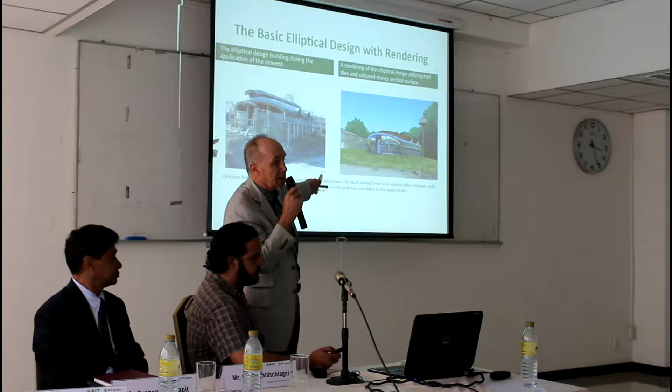This shows the building that I constructed in the mountains, under construction. That's a rendering of what it could look like, and a client of mine in Florida, in the US, asked if I could make a rendering that showed the same structure, but with a different look. And there it is, which is cultured stone and a tile roof over the ferrocement.

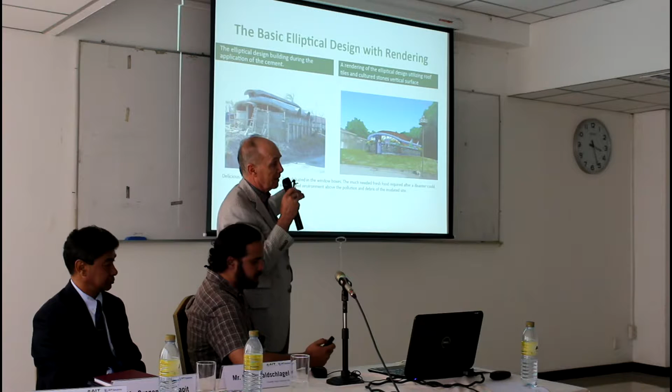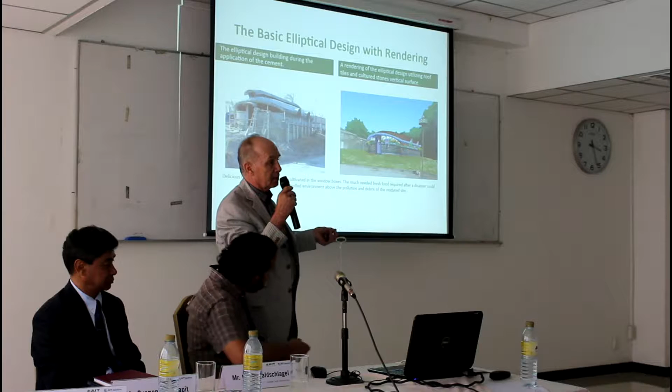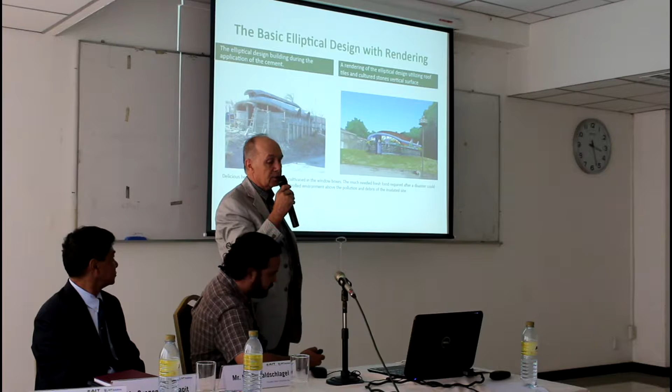It's an interesting thought I came up with when I was doing this one for them, that the gutter form could be used as a planter around the windows to make it look more cottage-like. But then I realized that people in a disaster, say a flood zone, the land would be useless and they couldn't grow crops, perhaps for a very long time, and they would need food right away rather than wait for food trucks. You could put good earth in the planters around your whole house and always grow lettuces and things like that, so you'd have a food source. And I'm sure when you have no food, it'd be very convenient.

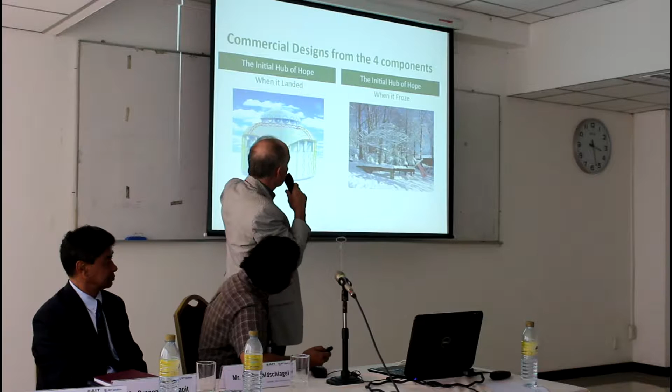This one on the right is in my yard on Staten Island, New York, and I thought it was just a nice photo covered with snow. This is a rendering of the beginning of what it could look like. I see this, and originally I designed it as being 150 feet in diameter, some kind of, I called it the initial hub of hope, a hospital or trauma center.

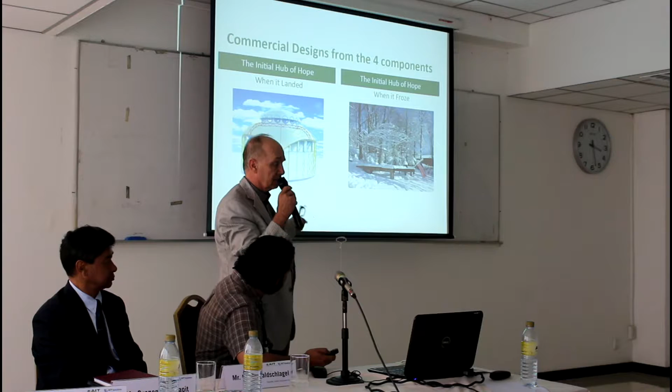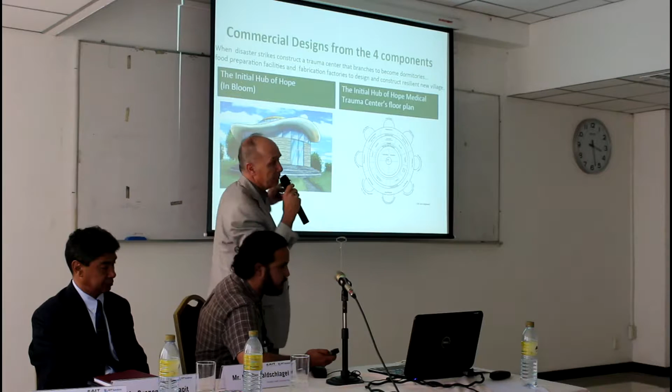I'm going to try to describe the simplicity of constructing these buildings. They're very tent-like. So that's the floor plan, and that's another rendering of what it could look like with a finish on it.

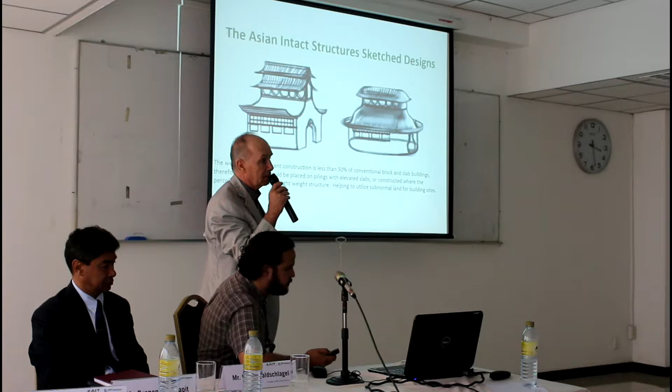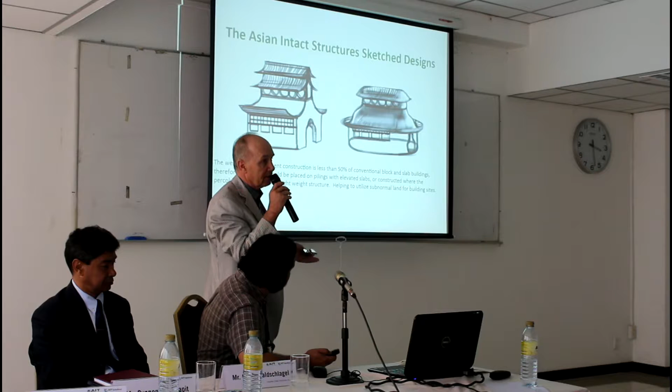These are sketches that I try to make an Asian intact structure, to make the buildings look different. I'll probably be able to show you how the components, of which there are about 5, all make these designs and shapes that you're seeing.

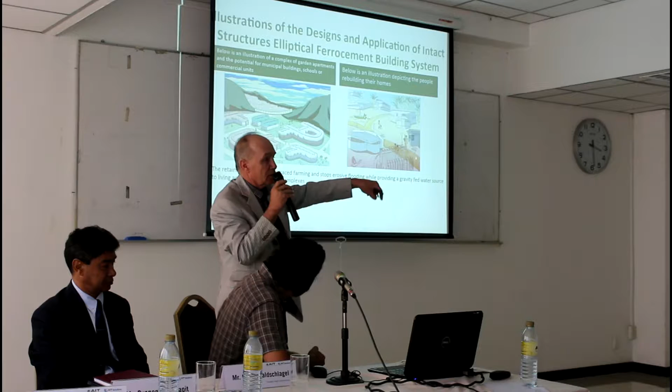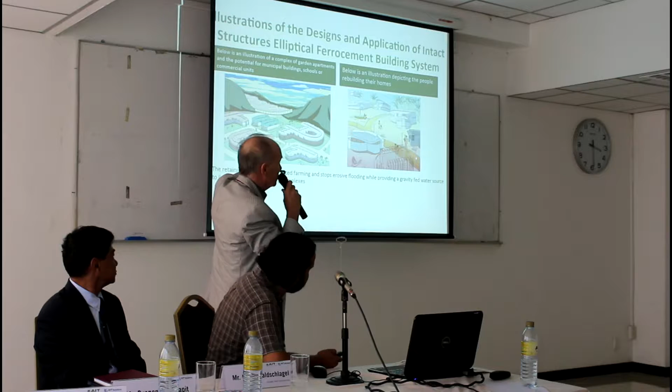These renderings are basically the shape of the building that was built in the mountains in Mexico. The components, which you can see in the frame, more or less just go around the perimeter of any footprint or foundation that you made. Those buildings could be, I speak in feet, so they could be 100 feet long, like garden apartments, factories, or schools. And they could have inner courtyards for safety in very dangerous areas of the world where there's so many refugees now, where they just fence them in and they're all unprotected.

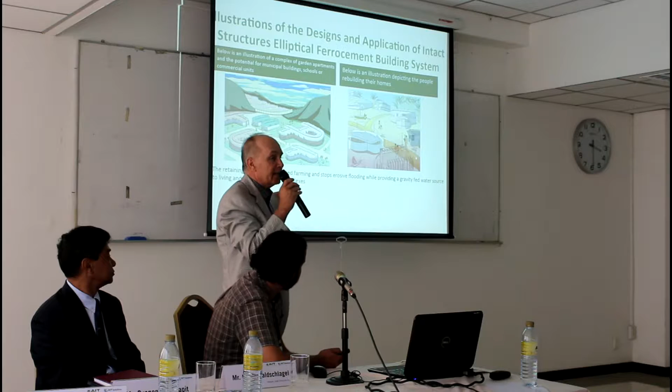Perhaps these are solutions to hundreds of thousands of people with nothing for a year. But they do erect like tents.

This was published in Ferro 9 in Singapore, the University of Singapore. This is a ferrocement retaining wall, and I did build a prototype on Staten Island in New York, a small one. But then I realized that because I built it without a footing, I don't want to actually call it a dead man, that block of cement in the back, holding it, and that's a geotextile on top of a ferrocement.

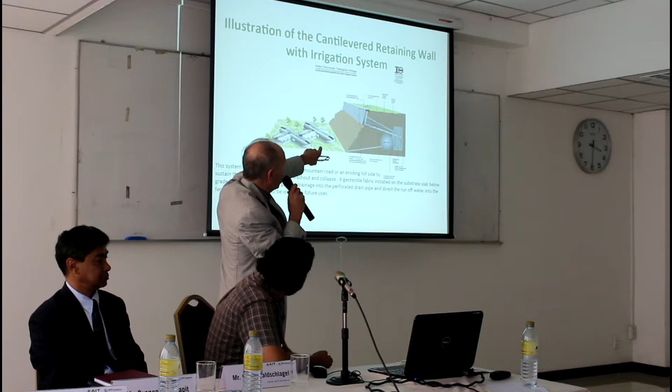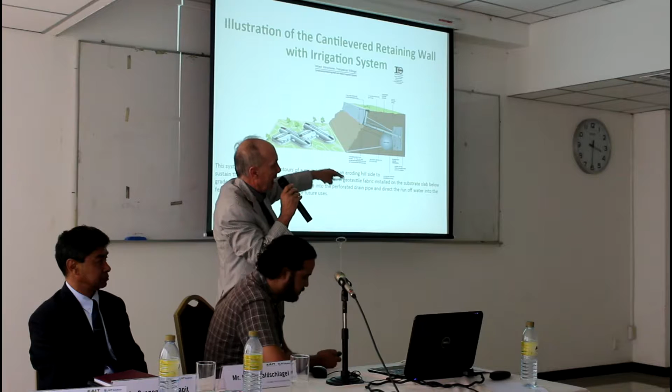Well, there's concrete beams coming out, and then there's a ferro cement slab, and that's a ferro cement wall. But there's a geotextile, so you get two irrigation potentials. When it rains, if you had a terrace farm on the top, it would come down, hit the geotextile, so you had one farm. It would then go to the tank, because the geotextile would capillary it back to the tank, and then you could irrigate or supply water to the valley below that had been, in the past, a flood zone or a mudslide zone.

There's another product that you're going to see from a company from Argentina that is also a ferro cement product that would also assist that, culverts or gabions. Let's bring it along, please.

The interesting thing with ferro cement, and this is just recent, I probably knew it, but it was probably subliminal, is that it's morphogenetic. In other words, you could show up at a site with exactly the same material, not many different types of material—rebar, 6x6 wire and wire mesh, Portland cement, and an aggregate—and you could produce tanks, culverts, pipes, houses, retaining walls, with the same thing, the same truck, everything's the same. That's morphogenetic, it's the same form. It's a pretty interesting approach.

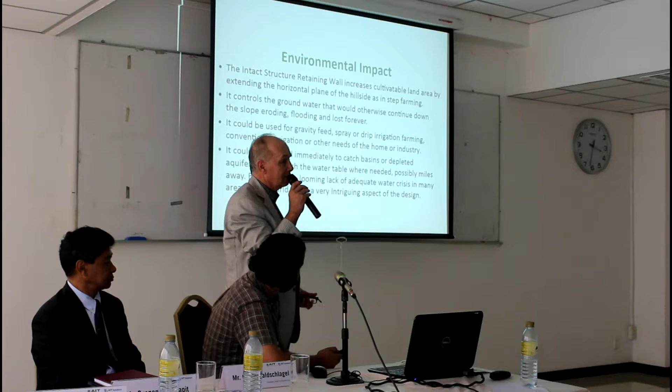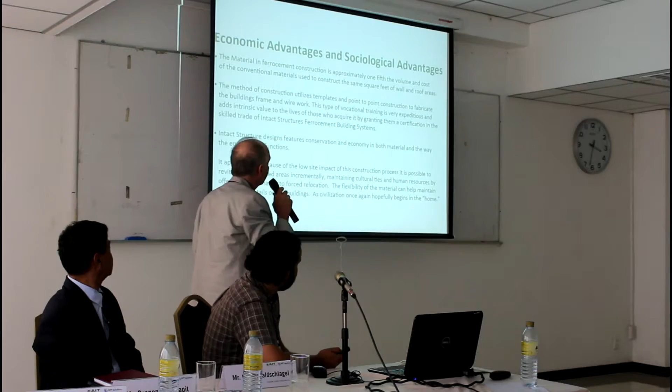I'm actually a designer constructor more than a ferro cement company. Obviously, I built a house in Mexico and that wall, but this company—he's been in the ferro cement business for 30 years, and he came to my yard and decided that I was onto something, and he's working with me. We intend to do two versions of that building system: one is precast components, and one is the way I built it in Mexico, because he's a precast expert.

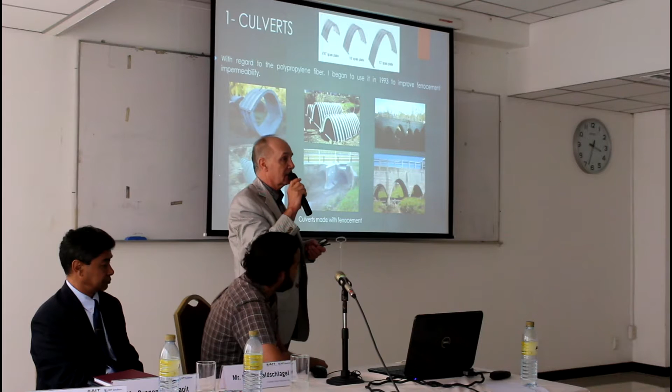And there is a man, J.A. Desai, who's a maestro of ferro cement in India, in Mumbai. I did go there twice, and I did study his work. Certainly I don't know what he knows. Carlos Giswin knows a lot about it, and he has these products, as I said, for 30 years in Argentina.

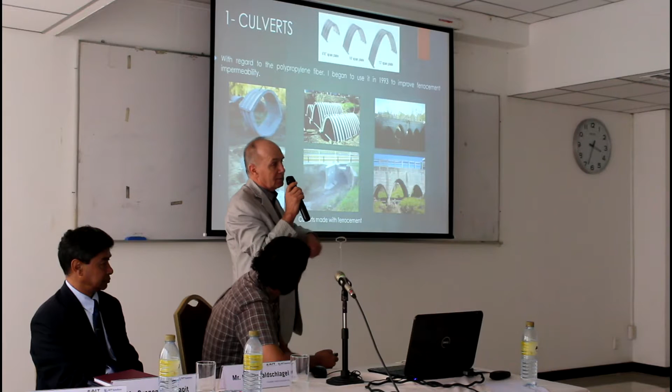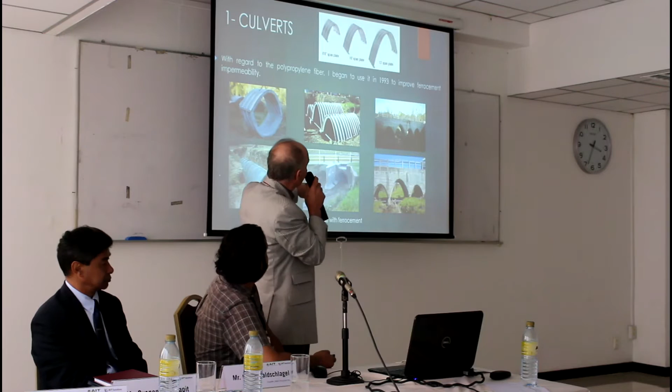This would dovetail into reclaiming land that we could get for nothing, perhaps. In rural areas, there may be land nobody cares about, because it never worked—it was always washed out, and you could stop that from happening, which is the way most of the modern world was built. Okay. Anyhow, so he has culverts, and he has—go ahead, please.

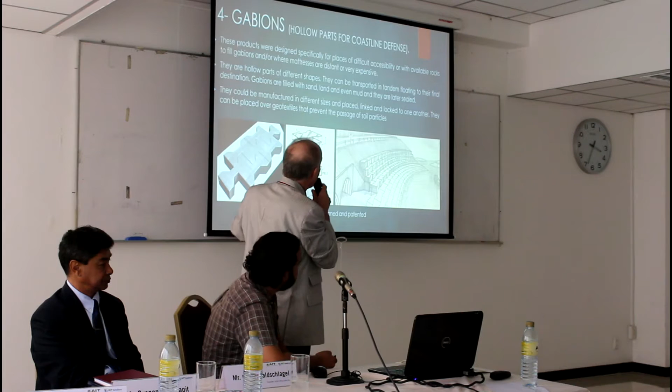Go ahead, please—pipes. Please—gabions, which I found very interesting. Please click, there they are. For stopping erosion and creating circumstances that I'm speaking about. And Carlos is ready, and he's asking for work, in a way.

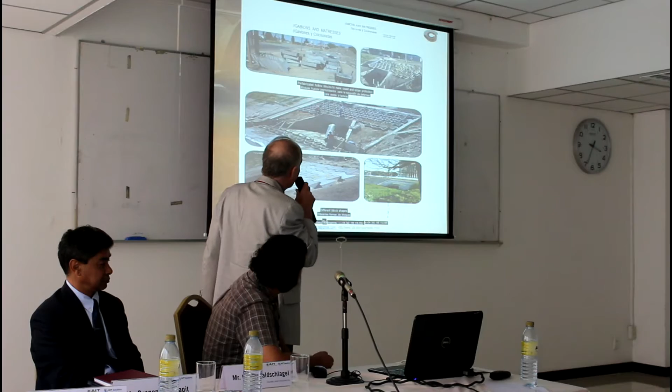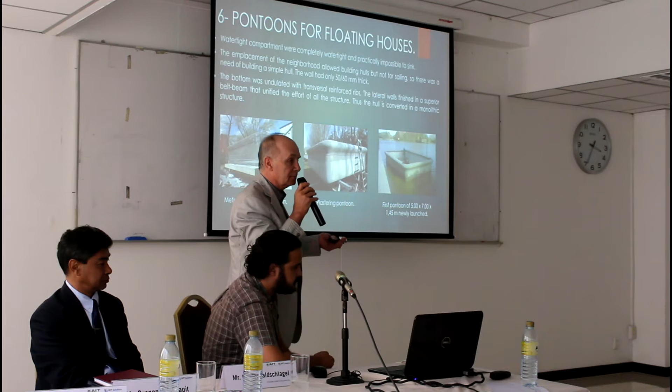Argentina's got an economy that's having trouble. He makes pontoons also, and I saw somewhere in one of these presentations about floating houses in Thailand. And somebody was very interested in that in the Philippines.

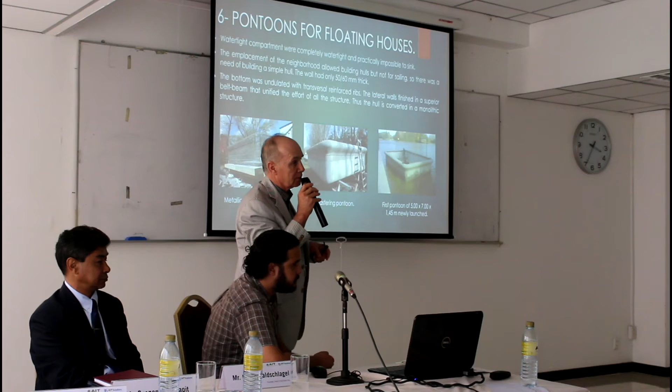By the way, what you saw in the beginning could be very good evacuation centers, and they are very sought after—things that would be structural after a disaster hit, where you could bring people and they would be self-sustaining. Okay, please click, there's this floating houses.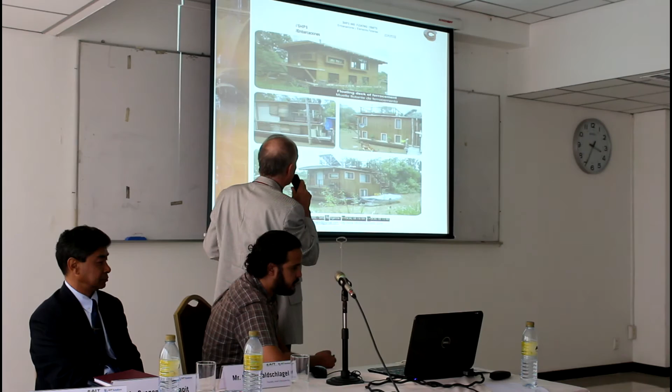One more, please. One more. More. I think it's over. I think that's it. Okay, hopefully it was sufficient enough to communicate.

Oh yeah, this will show. This will be quick, it's almost like an AutoCAD—it's my version of piecing together an AutoCAD. And also, if I had time, which I don't, that circle is what creates all the points that create that building. There's no measuring, there's nothing. It's self-forming in a way.

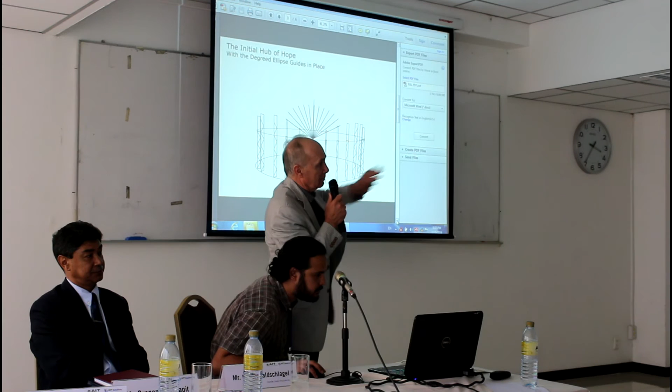Okay, that's one of the components, and you set them up as that. Go ahead, and you'll see. That's what I call—I have funny names for things—but it's five 18-degree angles that create 90 degrees that shoot out to create the ellipsoid. But I call it a turkey tail, because it'll look like a turkey in Mexico. Okay, next please, okay, that's it.

If I had time, that would tell you it's a 5-foot radius. Say this building's 20 foot, so the circle is 10 feet in the center. It's hard to describe it quickly, I can't do it. Anyhow, you put that ridge up, and those things connect to those points. All of these points to build this building are built into the building. There's no layout—you just run these things to the components, have the points in them. They're laid out already, once you level them up and put them up.